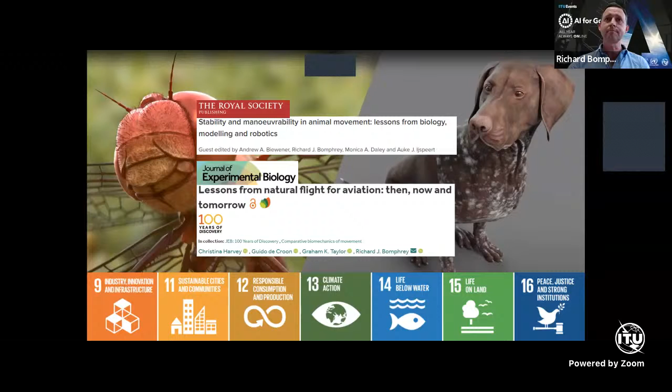And as they do so, they change the aerodynamic forces that are produced, which changes the three-dimensional flight trajectory through space. And as animals are flying or walking or running or swimming, they get a rich input of sensory information, which has to be processed by the controller. And that tells the muscles then how to activate possibly slightly differently, which changes the kinematics, and round we go along this control loop once again.

And then abstracting concepts from that, you can put them onto things which don't resemble the animals very much at all, but they potentially have useful capabilities which have been gleaned from that original observation.

So the messages and possibly the themes we're going to talk about today are that the mechanism I just described in that control loop, they're all interactive and they're co-evolved. If you change one, you'll change the others. In particular, for this one, you might say if you change the wing shape, then that's going to change the sensing information which comes into the controller. It's also going to change the dynamics of the muscles which are required to drive those wings, and so on and so forth. So essentially, it's all interlinked, and you have to take a holistic view of the whole process.

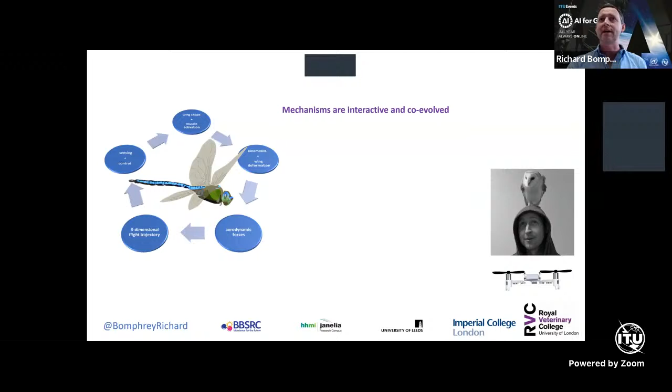We need to get a good understanding of the way that biological models work, and that has to be based on observational science. You can certainly be testing hypotheses as you go along, but having a fundamental look to see what's going on is definitely the first step on the way to these biological investigations. You might want to disentangle which aspects of the locomotion patterns are passive and which are active. And that can be in terms of processing, or it can be in terms of the physiology of muscular control.

And then it's never a good idea to blindly mimic an animal. So you might find that one is particularly skilled in a certain aspect of their locomotion, but it's doing a lot of other things as well. So it might have, for example, a reproductive system or a digestive system, which are not at all relevant to the robot that you want to build. So it's an abstraction of the concepts rather than blind mimicry.

So we sometimes do see from nature performance advantages, and that can be in terms of robustness and stability, topics which are definitely going to come up later in this session. It might be about the economy of travel. It might be things about the material properties and the processing and so on. But biological observation does not give a ready-made faultless design for any particular challenge that you may want to address.

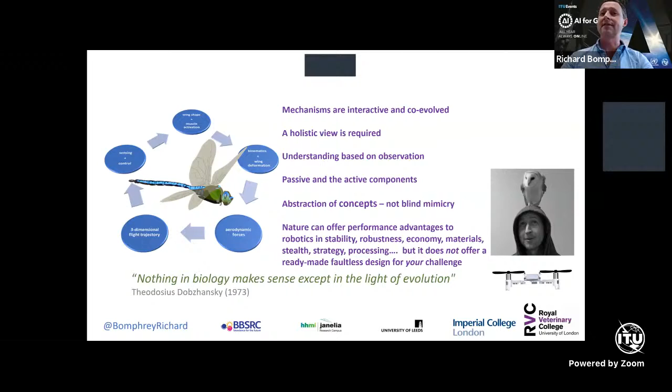Because you have to remember Dobzhansky's quote of 1973, which is that nothing in biology makes sense except in the light of evolution. So I'm going to give you some examples from birds, some examples from insects, and how they've been implemented into robotics concepts in my own lab. And we have a lot of fun with it.

Here is a 360 camera and you're riding on the back of a golden eagle around the lochs of Scotland. And this was a very blustery day, and the bird didn't flap its wings once. What you just saw was a tuck maneuver, which is a way of dealing with the turbulence. And so it manages to keep its head very still. It manages to track objects on the ground, and it manages to fly with very, very little muscular effort, all told. And so there's clearly some performance concepts there that we would quite like to assess and potentially emulate.

And to do that, we can bring it into the lab. And here we have a tawny eagle this time, flying over a big vertical jet of air. And what I want you to concentrate on is that for the tawny eagle and for the barn owl that's coming up in a moment, the head and the body remain very stable, traveling on a smooth trajectory, yet the wings pop up. And the reason that they do that is because they're acting as a suspension system to dissociate the masses in the wings with the masses in the body. And just like your seat stays more stable in your car while the tires go up and down, that's much the same as how birds are negotiating turbulence.

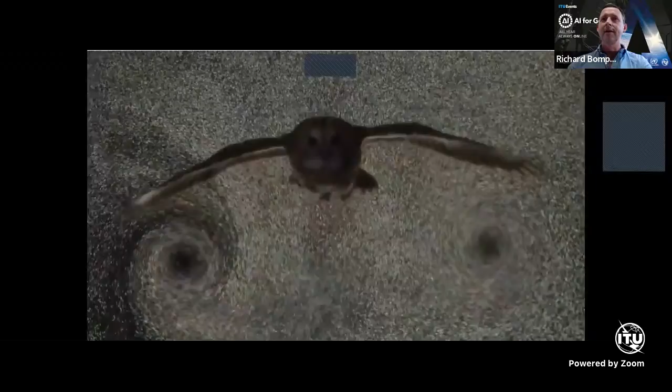We can also look at the drag produced by these animals, and again with clear implications for aviation. Here we're flying birds of prey through some neutrally buoyant bubbles. They're about 1/5 of a millimeter in size and filled with enough helium so that they remain suspended at a certain altitude. And as the birds glide through, you can see that they're swirling up the air, and we can do aerodynamic assessment of that to determine how birds are managing to, in this case, minimize the viscous effect of drag.

To quantify that, we can also track each of those particles. So here we're tracking 20,000 bubbles simultaneously with a company in Germany called LaVision. And the bubbles that are blue are accelerating downwards very fast, and the bubbles that are red are actually accelerating upwards, which is an economic loss, but it's the same wingtip vortex that you would see behind aircraft of all sizes.

Now moving on to insects.

We can do both structural modeling and we can do computational modeling. And here what you're seeing is a very high fidelity model of a dragonfly's wing. And we're subjecting it to a flow as though it's gliding. And you can see that the wing is flexing as it does so.

And this is part of the sensory information which is available to dragonflies for the flight controller that is fundamentally different and a completely different architecture from the way that we currently design aircraft. If you think about aircraft, they have a complex processor with redundancy, and they get very hot and they're not particularly efficient. Whereas insects manage to fly in a very robust way with a brain the size of a pinhead on the order of tens of thousands of neurons, which is very minimal processing power.

And one of the keys to this is to measure as little as possible, as infrequently as possible, and to do both distributed sensing and distributed processing. So by monitoring the strain patterns on this wing and understanding the sensors which encode those patterns, we can start to look at the flight controller and look at different neural architectures which can control complex motions in very unpredictable environments with capacity far in excess of what we can currently manage with engineering solutions.

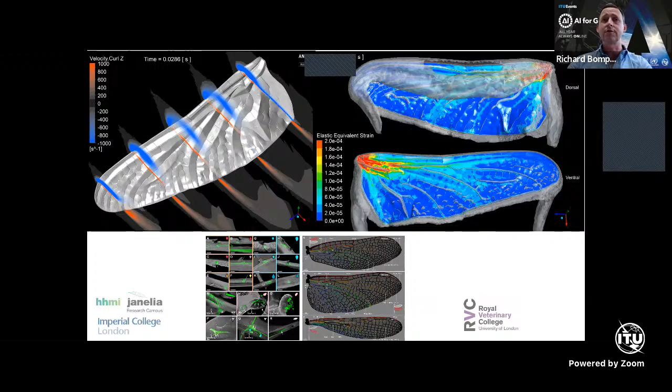We can also look at pest species which will have some societal benefits. In particular, I'm focusing on mosquitoes here. This one's Culex, but of course we've worked on malaria mosquitoes and dengue mosquitoes as well. And again, by tracking their wings, we can understand the aerodynamic flows that go on around these small animals, and also how they manage to have capabilities which we would like to emulate.

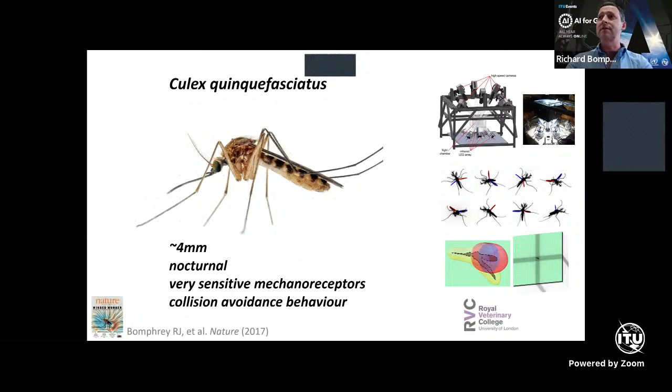In this case, how they manage to avoid surfaces without being able to see them. So even in the pitch black, they will avoid surfaces at light levels below that at which their eyes are functioning. We can also use the computational fluid dynamics analysis to understand their aeroacoustic communication in the swarms.

So in the center of this, there's a female mosquito, and the spheres that you see there are different sound levels, which may or may not be detectable by the males that are forming the swarm. And that can inform acoustic lures for trapping and surveillance, or potentially disruption of mosquito swarm and mating behavior.

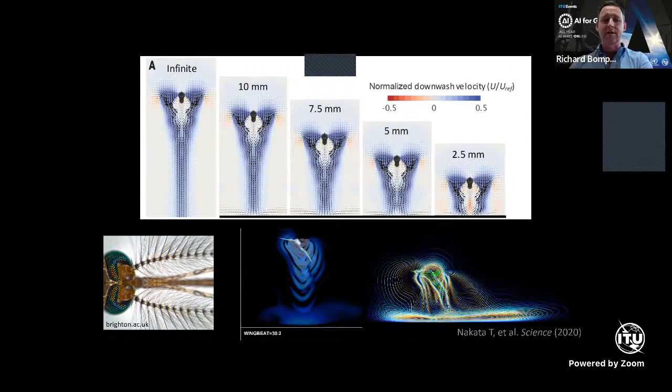If we look at the flows at different altitudes, we'll see that they're slightly different. And this is the same sort of concept as when a helicopter gets close to the ground and starts to incur recirculation. How do we apply that to robotics? Well, we can create small quadcopters which look nothing like mosquitoes, but are using, in this case, differential pressure sensors, which I've squared, if you like, in purple, running into convolutional neural networks, which can predict the distance and bearing to an obstacle which is approaching.

And we can combine that with other sensory modalities, such as vision or acoustic sensors, to get more than the sum of its parts, and therefore a future where we have quadcopters and other aircraft which are more sensitive to obstacle detection and therefore have improved safety.

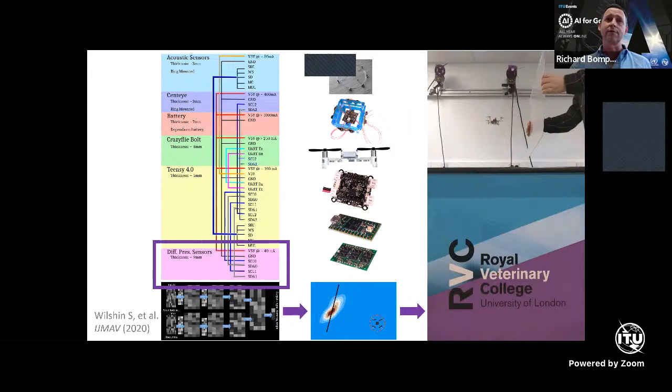Now, I mentioned earlier, we've got an absolutely outstanding lineup of speakers for you today. First up, we're going to have Andy Biewener. Andy's served for 20 years, I think, as editor of the Journal of Experimental Biology, including 16 years as editor-in-chief. He's going to be talking to you about legged terrestrial locomotion and also flight control through cluttered environments, and the principles of guiding movement so that it's both maneuverable and robust.

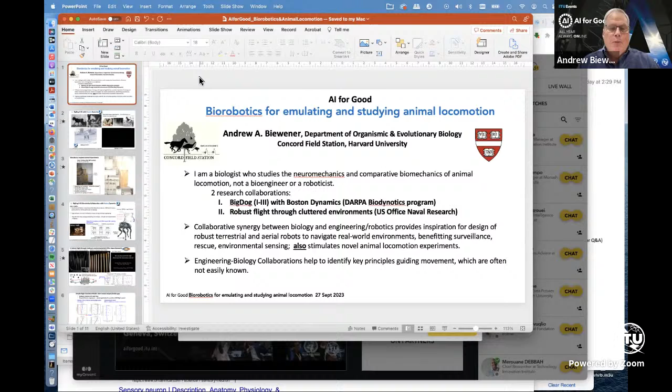So two main points out of these collaborations are, one is that there really is the opportunity for a collaborative synergy between biology and engineering and robotics, which can provide inspiration for the design of robust terrestrial and aerial robots that can navigate real-world environments that will benefit surveillance, rescue, environmental sensing, and other outcomes. These are outcomes that I think both Bob and certainly the other contributors will speak to.

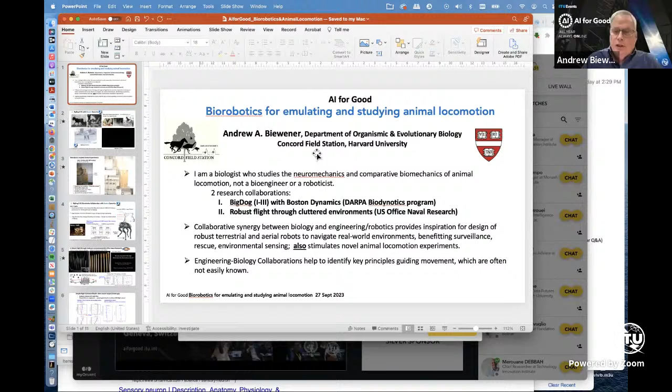So it also provides an important opportunity for stimulating novel animal locomotion experiments on the side of biology. And these engineering biology collaborations are really helpful for identifying key principles guiding movement, which are often not easily known.

So this is our collaboration with Boston Dynamics. Play this a little bit. This is Big Dog 2, but you can see the dynamic robot. I'm going to get rid of the camera. So it makes a lot of noise, but it was stable and moving over a rock field.

And this test on the robot was stimulated based on experiments we did describing the ability of goats to run over a rock wall and their ability to stabilize their feet on both uneven surfaces of rocks and rocks that move. And this came out of studying the design of their hooves. The cloven hoof is an artiodactyl feature. They're able to conform automatically, so passive control of conformation to rock surfaces gave them increased stability.

And then with the ultimate Big Dog 3 here showing it moving over uneven terrain down a snowy slope, and then also being able to maintain support on an icy, slippery surface. So a lot of the control of this Big Dog 3 really was both developing control algorithms, but also understanding the underlying biomechanics of legged locomotion for controlling energy state of the center of mass.

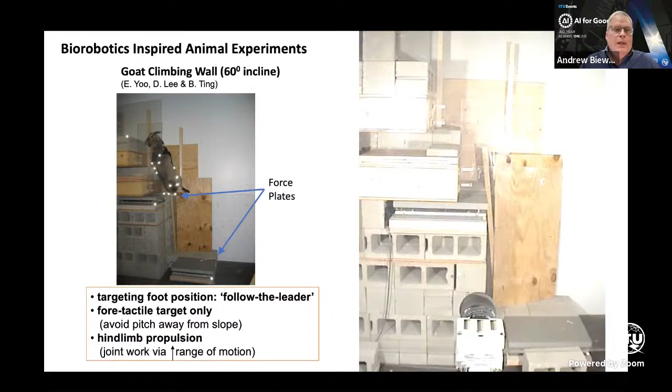So the main insights from our collaboration with Boston Dynamics was that quadrupedal robots really require for stability a knee forward, elbow back configuration. This is Big Dog 1, which had the knees pointing backwards as the elbows do, and it really was not stable and couldn't negotiate over that rock wall. So a simple matter of orienting the knees forward and the elbows back, as David Lee's work, who was a postdoc on the project, showed, biases the ground reaction forces closer to the animal center of mass and reduces the pitch moments.

And we did subsequent experiments with goats and dogs running over force platforms to quantify pitch moments relative to the center of mass and show that they were minimized during trotting and increase in galloping, but they were really able to minimize those pitch moments by moving the center of ground reaction force and the ground reaction force center of pressure relative to the animal center of mass.

We also found that goats and dogs have energy dissipating foot design. So over here, we modeled the joint mechanics of the elbow, wrist, and metatarsophalangeal joints and metacarpophalangeal joints in the knee and the ankle in the hind limbs, where the proximal joints were able to do actuator work and produce energy for moving the animal to increase its center of mass energy state. The distal joints actually dissipate energy. So it's really the design of muscle tendon units that act as dissipative elements, sort of stabilizing the animal. And this was probably central to the ability of the goats to move over uneven rocky terrain.

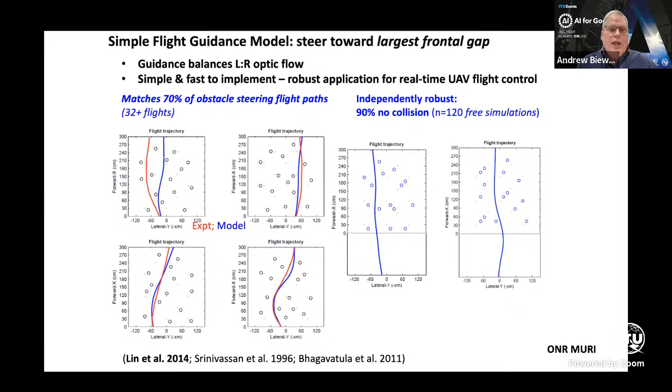So the main insights that came from our collaboration on controlling UAVs through cluttered flight is that birds, in this case pigeons, are highly maneuverable. A simple widest gap navigational model captures a large majority of the flight trials through the cluttered forest, which was these vertical obstacle poles. It greatly exceeds the navigational maneuvering ability of the UAVs, as you saw in the video of the one UAV navigating through two poles of a given spacing.

And as you can see from the videos of the pigeons, wing morphing, the ability of the birds to change the shape of the wing in real time, as well as a superb kinesthetic sense of their body and wing position, underlies the bird's ability to robustly navigate through cluttered environments.

So to finish up, my main take-home points for this webinar are that, no surprise, animals are far more agile, maneuverable, robust, and adept at locomotion under challenging conditions compared with biorobots. And this minimizes both their fall and collision risk. Animals successfully integrate visual, in the case of birds that's a key sensory cue, but also proprioceptive feedback to guide their movements. And this is something that Richard covered in his introduction.

And I would like just to emphasize that most biorobots are teleoperated. They're not really autonomous in terms of navigation. So developing true autonomous robots that can navigate natural environments is really a great opportunity for artificial intelligence to help develop guidance for biorobotic movements and, importantly as well, decision-making. And so in that context, they have the potential for very good services in terms of surveillance, rescue, environmental sensing, et cetera, in natural environments.

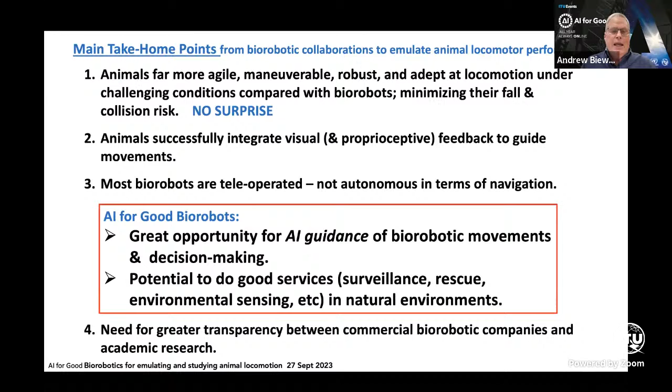So with that, I'm going to turn it over now to Aimy to continue. So I'll stop sharing. Thanks, Andy. That's fantastic. I've got a ton of questions myself. I imagine they're coming in over the neural network as well. But we have to be good and wait for them all for the end. I'll contain myself as well. Okay, so if you're ready to go, Aimy, we very much look forward to hearing what you've got to say. Thank you. Sure.

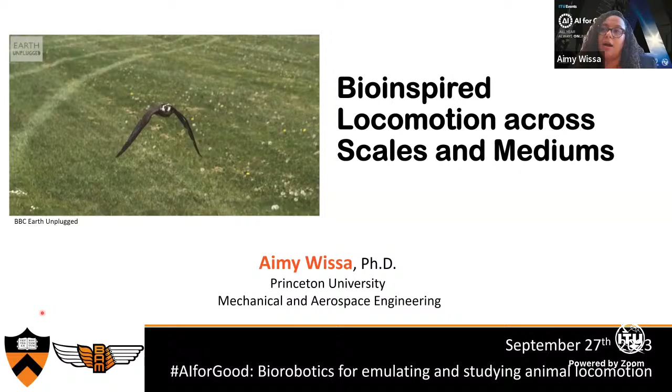Perfect. Well, thank you so much for including me in this panel. I look forward to sharing with you my passion about bio-inspired locomotion across scales and mediums. I'm an engineer by training, so I'm looking forward to sharing my perspective on how engineers contribute to the field of bio-inspired robotics and how true collaborations between biologists and engineers really are the way to advance this field forward.

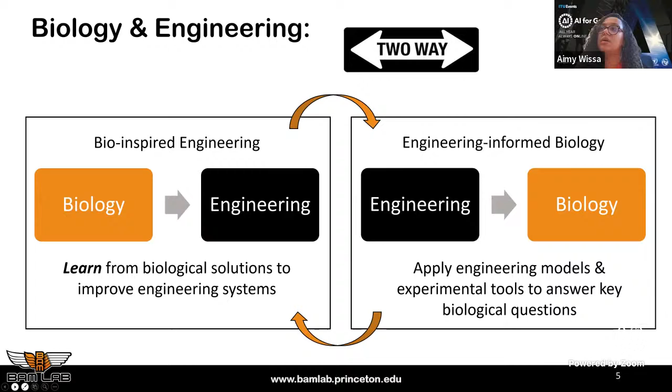So you can walk this two-way street in many fields: materials, controls, collective behavior, different areas. My lab really walks it in terms of locomotion and movement strategies. So for today, I want to spend some time telling you about an example of the bio-inspired engineering way of the street, or how we can learn from birds to design better UAVs, for example. And then the other half of the talk, showing you an example of engineering-informed biology using the flying fish as the case study organism. So let's get to it.

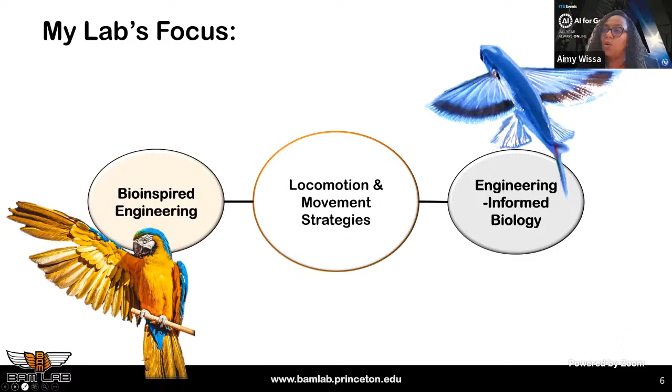Now, when you do bio-inspired engineering, basically you start with a societal need or a problem in our engineering world, and then you find a viable biological solution, and then, through learning and adapting and building and testing and modeling, you finally come to an engineering implementation that doesn't necessarily mimic the biology, but that captures the important physics.

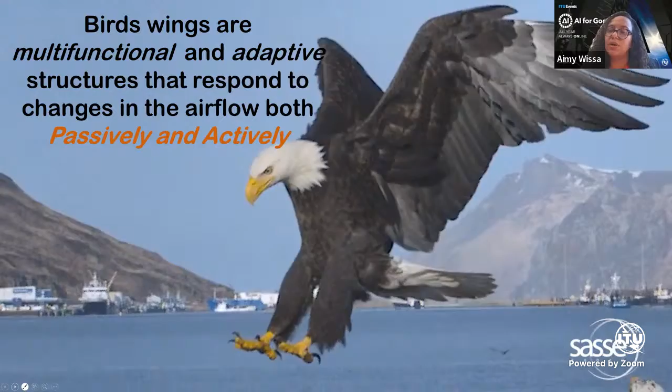There's a lot of things we can look at here: the sensory, the large wing kinematics. My lab just looks at feathers and their role in distributed flow control. I also want to point out something important. When we look at bird wings, unlike aircraft wings, what we see is a multifunctional and adaptive structure. It creates many functions and is able to respond to changes in the airflow, both passively and actively. And I think Richard touched on this.

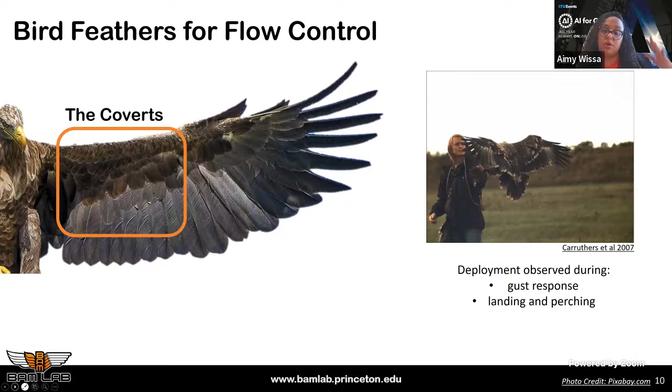My group focuses on a group of feathers called the coverts, and that's what I want to talk about for the next few slides. Birds have many feather systems, and one of those is the coverts. They're on the top and bottom side of the bird wing, and flight observations have shown them to be deployed during a gust or during a landing and perching maneuver. As an engineer, the big question I have is: can we use something similar to the coverts to enhance the performance of UAVs, especially at high angles of attack or extreme maneuvers?

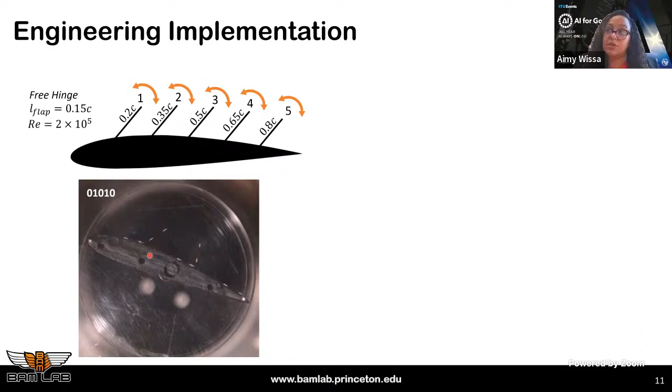So we designed a very simple system. It does not look like feathers; it actually looks like just flaps, and we distributed them all around the airfoil surface. These are purely passive, meaning the oscillations you see are purely in response to the aerodynamic loads. There is no sensing, there are no actuators. We put this in the wind tunnel, and we are able to measure forces and torques, and use lasers and cameras to actually see how the air flows around the wing.

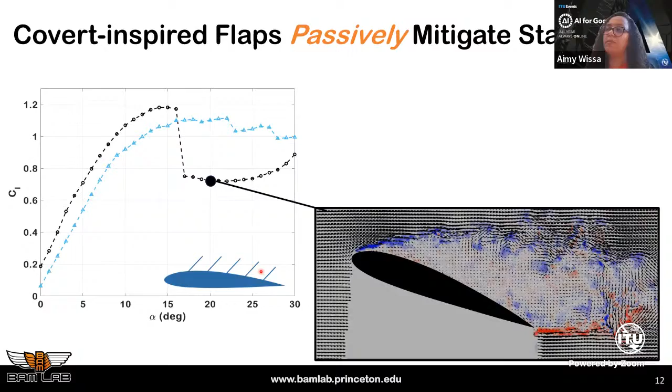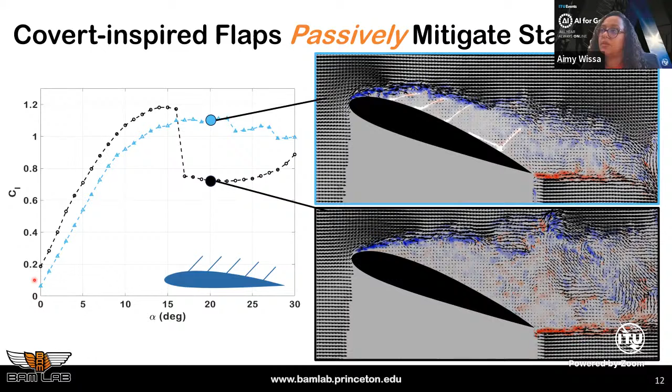Now, we create a system with 5 of these flaps that are passively deploying back and forth, and you have mitigated stall. There is no significant drop in lift. And when you look at the flow field in this video, the air is a lot closer to the surface of the airfoil; this shear layer is a lot closer to the surface. And we're looking at enhancing lift by about 50%. That's payload capability that is really impressive for UAVs.

But this was all passive. Because we understand how this principle works, we can now implement it actively. So we do a control system.

We're able to put this in front of a wind tunnel. Here's a wing that has no tail. And just by having an upper surface and a lower surface covert-inspired flap, it's able to be stabilized in yaw. And then we can take this actually to the field.

And here's an airborne kite. That's an inflatable kite with these bio-inspired flaps, and it's able to fly and regulate its yaw oscillation. And here it's doing something called a figure 8 maneuver that is used for energy harvesting, wind energy harvesting, by being connected to a motor and a winch.

So this shows that carefully abstracted design and carefully abstracted biological principles can actually help us design better flight systems in general, both passive and active. Now, if we jump to the other side of the street, I want to show you this engineering-informed biology looking at the flying fish. This is a collaborative project with Professor Brooke Flammang at NJIT.

And in this case, we start with a biological question about the flying fish. And then we try to design a physical model that can capture what's biologically relevant. And then we use that to form new hypotheses and ask questions about the locomotion of the flying fish.

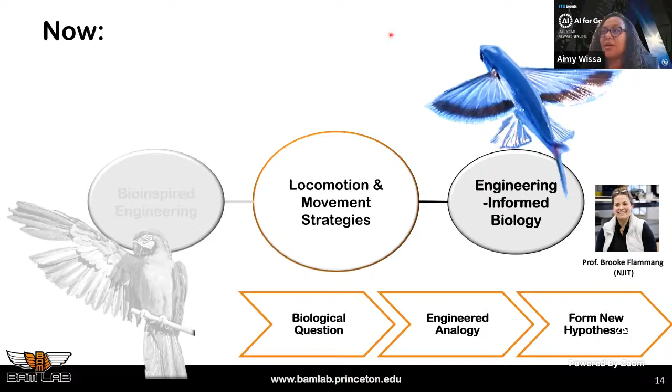So if you haven't met them before, meet the flying fish. They are awesome fish. There's about, I think, 27 species. And what's really interesting about them is their ability to be both efficient in swimming under the water and gliding above the water surface. And this behavior would happen if there's a big predator that is attacking the fish from below.

And if you kind of break this locomotion cycle, first you start, it's a fish, so they swim. And then when there is a threat, they leap out of the water and they deploy their wings. Sometimes they need to actually taxi on the surface of the water using their caudal fin or their tail until they get enough speed. They're able to take off.

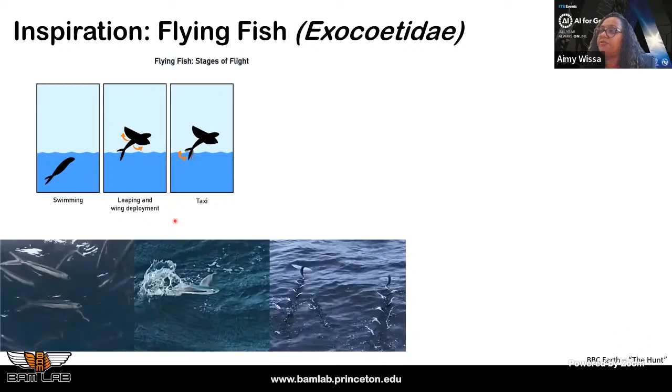If the threat didn't go away, they keep doing this, and they're actually able to do this for up to 0.5 kilometer. This is gliding. It's not a powered flight, which is really interesting from an energetic standpoint. And then when the threat is over, they just go back in the water and keep going. These are the main features that I want to draw your attention to: the pectoral fins, the pelvic fin, the caudal fin. And for the flying fish, we just asked 2 questions.

The first one is, what is the deal with the pelvic fin? So that's a biological question. Why do some species have pelvic fins while the others don't? Or maybe a better question is, how do the species that have pelvic fins use them compared to the ones that do not have them?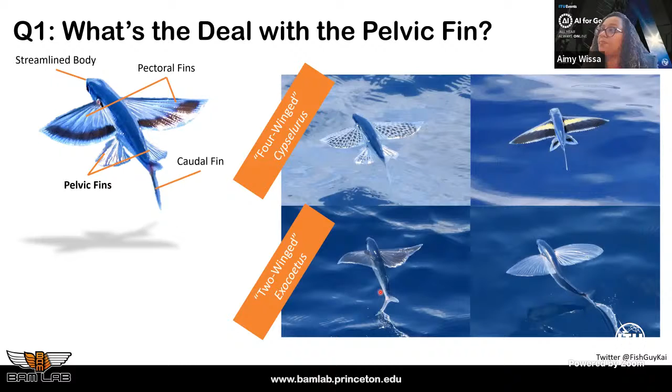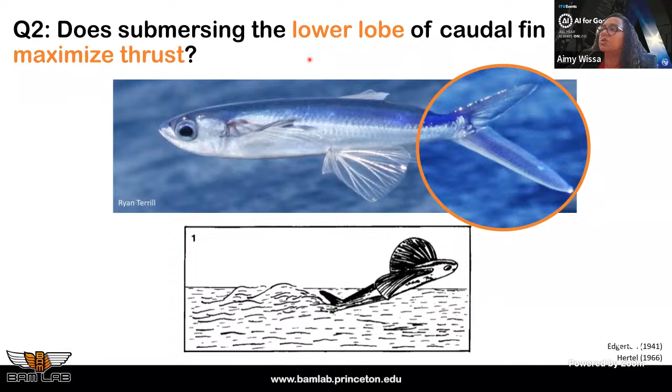The other question we asked is, if you look at the flying fish, they have a really interesting caudal fin. It's asymmetric, and very old but awesome research showed that during taxiing, only the lower lobe is actually submerged. And the big working hypothesis is that during taxiing, the fish only submerge this, and the goal of taxiing is to be able to get out of the water as quickly as possible. So the question is, is there any thrust benefit of just submerging the lower lobe?

To answer both of these questions, it was really hard. As you can imagine, it's really hard to capture these flying fish, to keep them in the lab. They need meters and meters. So one of the best ways to study them is to use a robotic model organism or a physical model of the fish. So here is a video showing the robot we designed. It's modular, it has a simple design, it does not look like a fish at all, but it captures the right movement, the right kinematics, the right dynamics, and the right physics.

And it's modular. So here it is just on a stand, just to show you the swimming motion. Then we added pectoral fins, and this allows us to also look at flight. So then the robot would have the caudal fin to allow us to study some of the hypotheses about the taxiing, and the pectoral and pelvic fins that allow us to study the first question.

So real quick, for the first question, we did wind tunnel testing for configurations with and without pelvic fins, and we're able to move it across the robot. For the second question, on taxiing, we actually designed the robot, put it in the water channel, and varied the submersion depth of the fin.

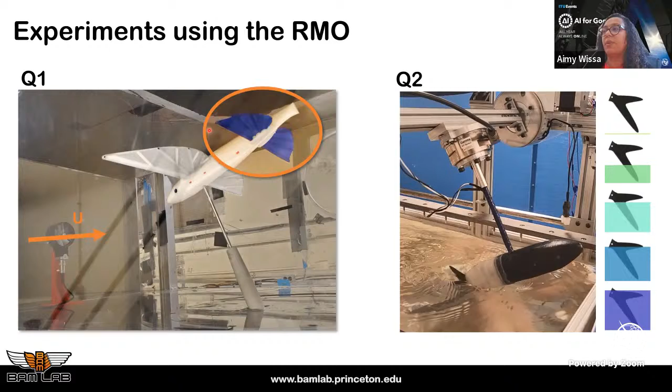And for the first question, we found what is the benefit of the pelvic fin, and we actually found that it's a trade-off between efficiency and stability. And then we found that the right location of this trade-off is to put the pelvic fin somewhere in the rear of the fish and at intermediate pitch angles. And actually, by looking at actual footage of flying fish through crowdsourcing, we found that for most of the species we were able to get footage of, the pelvic fins are located in a place that suggests that trade-off. It's not really favoring efficiency or stability, but between both.

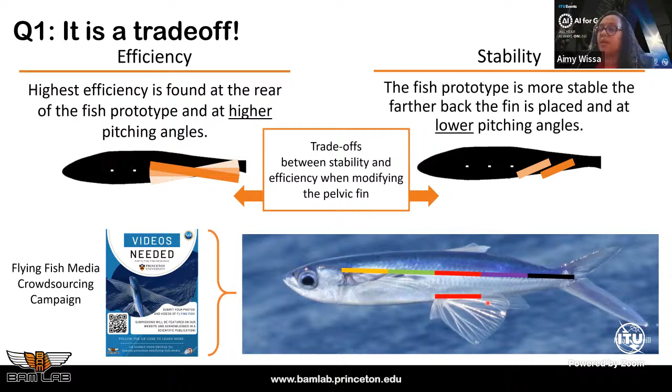For the second question, we found in the experiments that I showed you that actually there is no thrust benefit to just submerge the lower lobe. So maybe there's other reasons why the fish is only submerged in the lower lobe, or because of how old these observations are, maybe it is not just the lower lobe and the whole caudal fin is submerged during taxiing.

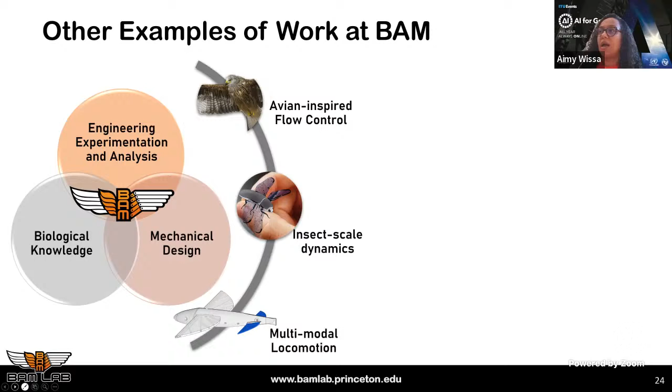So to conclude, I just want to highlight that this kind of research on bio-inspired robotics, for the other panelists and myself, is highly interdisciplinary. It would not be possible without all these collaborations. And it is challenging because it requires us to think about different physics. And it's a large parameter space. There's a lot of things to consider, and that's where AI can be of huge benefit to reduce such a parameter space.

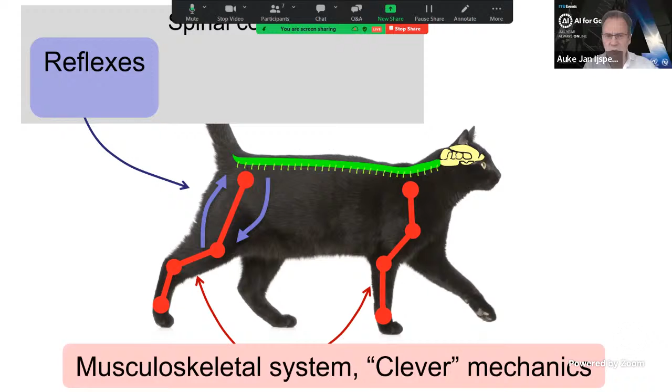And at the first approximation, I think there are 4 main ingredients. The first one is the clever mechanics, the musculoskeletal system, which is very well designed to do locomotion. Then there is the spinal cord with, obviously, multiple reflex loops that are super important, and this very interesting concept of central pattern generators. These are networks of neural circuits that can oscillate by themselves, and they act as a kind of feed-forward controller to provide rhythmic patterns as necessary for locomotion.

And then obviously you have higher levels of the brain that will modulate all this with the descending pathways. But what's interesting is there's a fairly finite number of these pathways, and there are not that many. So it's a bit like a puppet on strings, where with a limited set of strings, the higher part of the brain can modulate complex locomotion. And I find this very fascinating. So in my lab, we like to use models and robots to investigate how these work together. And especially we focus a lot on the spinal cord circuits, how the feedback and the feed-forward components of the spinal cord work.

And we have the hypothesis that during evolution, the respective role of these components have changed, with lower vertebrates like lamprey and salamander being more CPG driven by the feed-forward central pattern generators. And the more you go to terrestrial mammals, which have more unstable locomotion, the more you need to have multiple reflex loops and more descending modulation to do visually guided feet placement.

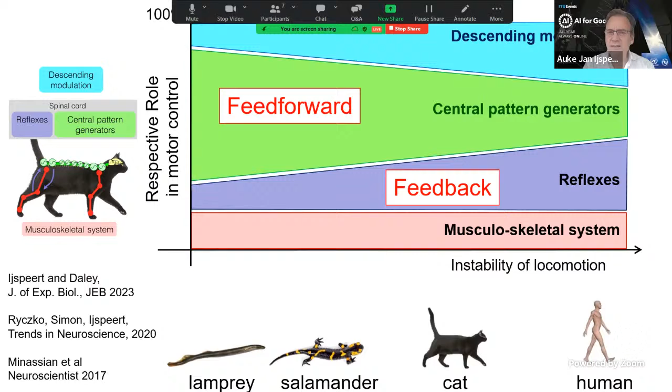But to test this, we need models, so models of these circuits. And I think robots have a key role to play to close the loop with the real environment. And here, one of my favorite animals that I've been studying for quite some time is the salamander, which is a very interesting animal. It's a very old animal. And here as an amphibian, we made a robot that can replicate it.

And what was interesting is that we could show the beauty of the central pattern generators, how they can beautifully control locomotion under the control of, in this case, just 2 descending drives, representing stimulus from high parts of the brain sent to the spinal cord. In our case, we do it with a remote control.

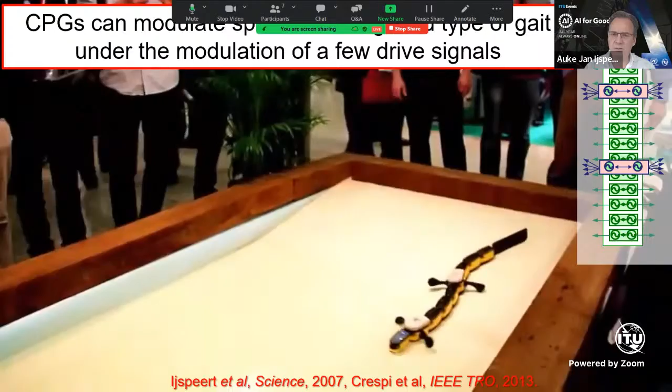But what we could demonstrate is that with 2 signals, you can nicely control the speed, the heading, and even the type of gait by going into swimming mode: high drive mode is swimming, and low drive mode is walking. So I think this is a nice invention of nature, to have this multi-layered control and make sure that the spinal cord is in charge of this low-level pattern generation that you see here in the salamander.

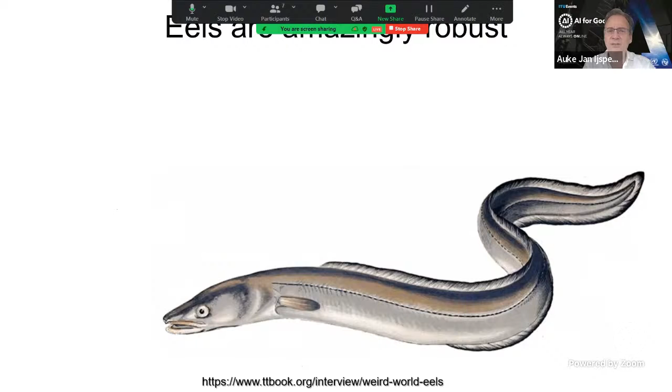Nowadays, we look a lot at sensory feedback, how sensory feedback plays an important role as well. And we went back to just anguilliform swimming, as you see in lamprey or eels. And here what's interesting, for instance, is the eel is a very robust animal, in the sense that if you do a transection of the spinal cord of the eel, it can keep swimming and you almost see no difference compared to the intact animal. So it's very robust in terms of swimming skills.

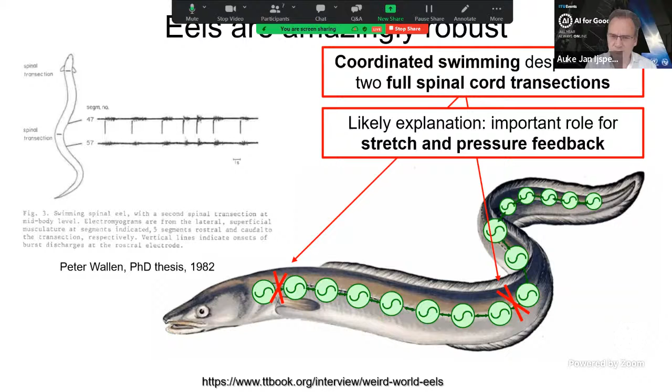And it looks like, therefore, there must be some kind of local mechanism below the transections to be able to keep the oscillators active and to keep them synchronized with the rest of the body. And it must be sensory driven, since the descending signals are not arriving anymore below the lesions. So here with colleagues, we wanted to see how this works. And again, using simple models of the circuitry, the oscillators, the coupling, the feedback, and the robot, we could study how possibly this works in the real animal.

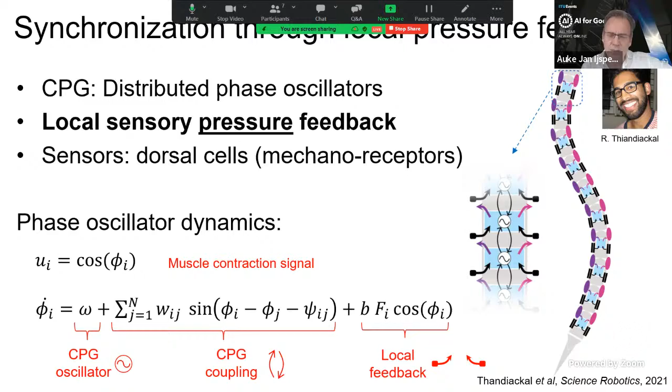So what we did is, for instance, design a swimming robot with a very primitive skin, where we have little load cells behind each little black plate. And with that, we can mimic a bit how the skin can sense force between left and right on every segment. And we can provide that to our models of the spinal cord.

And what's interesting here, like also mentioned by Amy, we can do things that are very hard to do on the real animal. On the real animal, we know the circuit is complete. It has feedback, it has coupling, it has oscillators. But here we can see systematically what's the role of each of these components. And maybe the most interesting result of the paper was when we removed all direct couplings, like an extreme case of the eel experiment. There's no communication directly between the oscillators. And we wanted to see if the local feedback could compensate for these missing connections.

So here is what happens. On the left, you see a video where we start with random initial conditions. There's no coupling and no feedback. So obviously, there's no way of synchronizing all these oscillators, and there's no way of getting good swimming. You kind of get a bit of wriggling, but not forward locomotion.

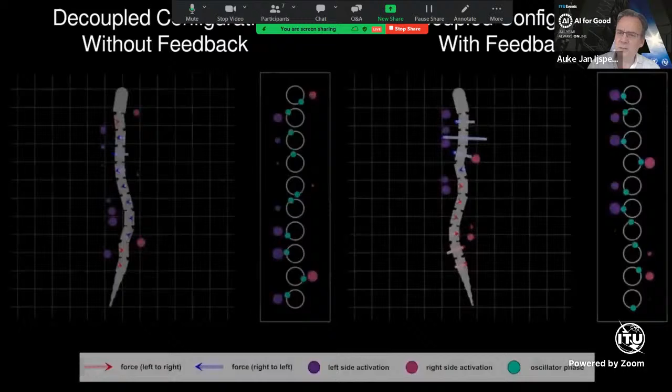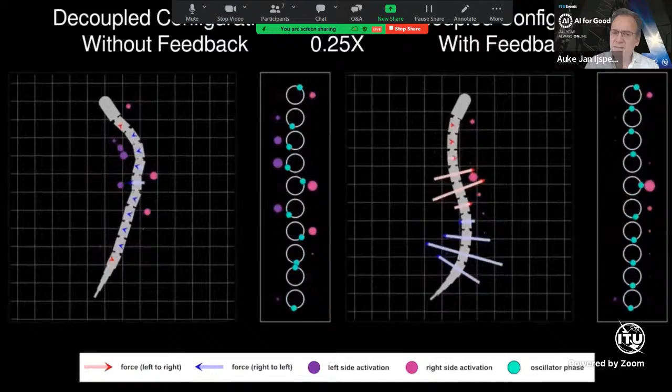But what's interesting, if you now include the feedback and still don't have any coupling, the feedback, even if it's very local, leads to a global emergence of the traveling wave. And it synchronizes beautifully. And not only that, it also synchronizes at the right phase lag to do very good forward swimming. So that's interesting because it means that in principle, sensory feedback could synchronize all these decoupled oscillators. And it's probably what happens in the eel, where the feedback compensates for missing couplings.

So we also did this on the real robot. It takes a bit more time to reach steady state. Every oscillator doesn't know what the neighbors are doing. But by just measuring the local force of the water on the left and right of the skin, that local signal becomes a nice global emergent phenomenon for swimming.

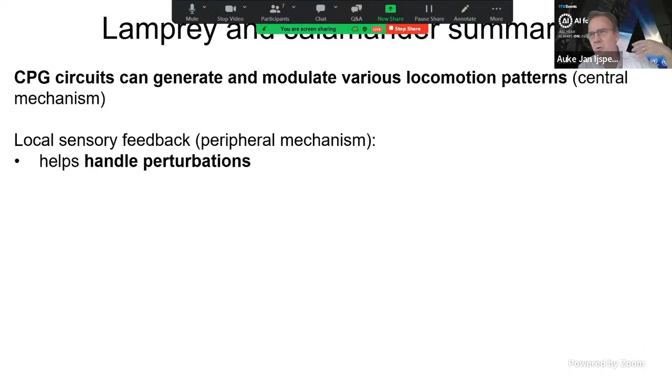So sensory feedback also does its job on the real robot. So to summarize, what's interesting here, I think, is the fact that CPG circuits have this beautiful feed-forward component and can modulate locomotion extensively. But on top of that, the feedback plays a lot of important role, not only to handle perturbation, which is obviously important, but even can contribute to synchronizing oscillators or even generate rhythm, something I didn't

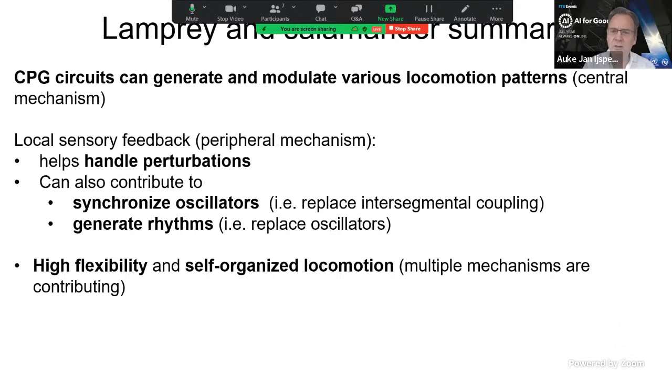have time to cover. So therefore, in animals, there's this beautiful flexibility and self-organized locomotion where many things we see are like emergent properties of multiple mechanisms contributing together. And in terms of robotics, I think this is a very nice source of inspiration for a very fault-tolerant distributed control. You can make systems that are really robust and keep swimming despite having missing connections or missing sensors.

Now, very rapidly, in the last 2 minutes, another project where we wanted to use robots to explore locomotion. This was a nice collaboration with John Nyakatura and John Hutchinson, where we wanted to study the past and use a robot to study the Orobates, which is an early tetrapod. It's in between amphibians and reptiles. And what's interesting, it's an extinct animal, it doesn't exist anymore, but we have a very well preserved fossil of that animal and also preserved footprints of the same species.

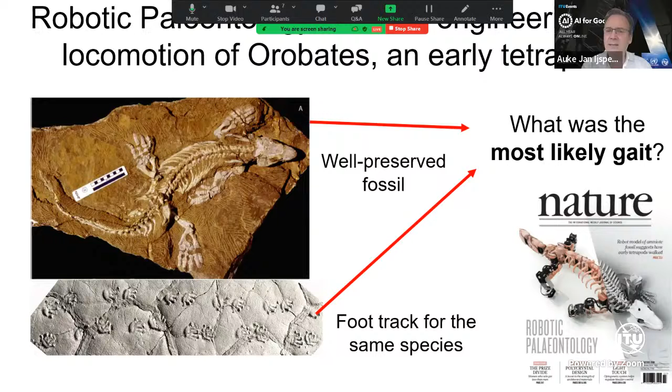So it's a kind of a unique way of trying to match a morphology to a foot track and see what was the most likely gait that that animal had used. And here again, a robotics approach can be useful to do scientific work because we can replicate more or less the morphology of the animal. And then we can use inverse kinematic controllers to systematically explore the space of possible gaits that this animal could

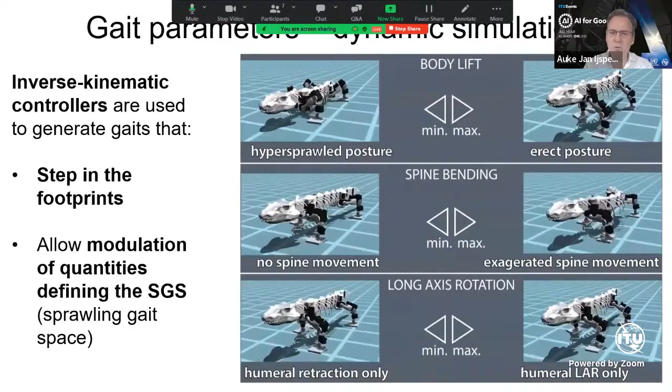have used. And in the paper, we define different important criteria like the body lift, how high was the body, how much did the animal use the spine, how much does it use the first degree of freedom versus the second one in the chain of the limbs. And basically, we would explore all possible gaits that this animal could have been using. And what's interesting, we could also compare that to modern animals.

And what we found out is, first of all, that in principle, the animal could have used many, many gaits. So all the little points here are possible gaits that the animal could have used. But then if you quantify how likely they are according to some metrics, like how much energy does a gait use, how well balanced is it, how accurate is it to walk in the footprints, we kind of zoomed in into the most likely gait and found that the most likely gait is very similar, we believe, to the caiman, which is a quite modern reptile.

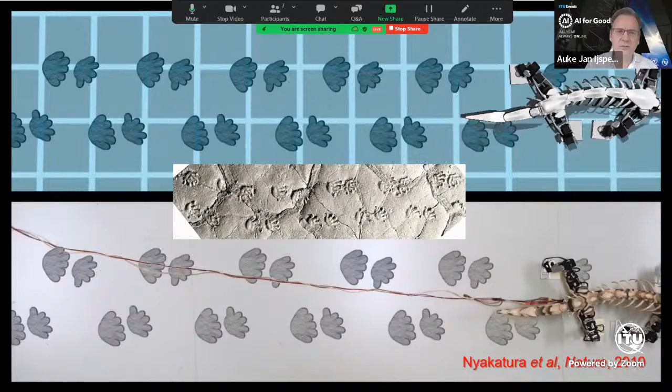Thank you. It's really interesting how you have to advance as far as possible to look back as far as possible. I'm sure there's an analogy with space telescopes or something like that. But yeah, that was great.

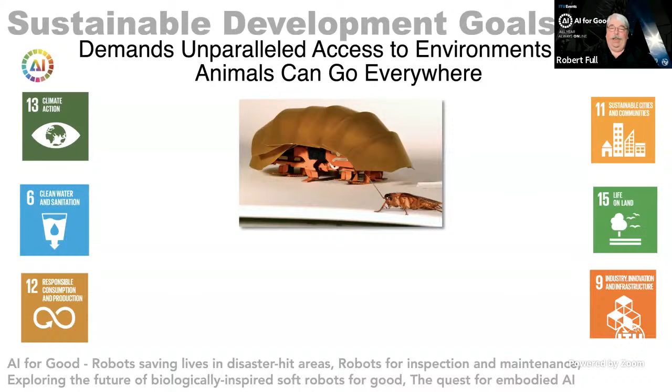Thank you for this opportunity to discuss biorobotics for emulating and studying animal locomotion. Many sustainable development goals demand unparalleled access to the environments. Animals can go everywhere and therefore can inspire robots that assist us in biodiversity conservation, environmental monitoring, safety inspections, natural disaster search and rescue, and security.

Bio-inspired robot design is challenging, but fortunately there continues to be a convergence of life and technology, bringing together enabling technologies, theory, synthesis of systems, and an increasing application demand. Nature's diversity really does enable discoveries. You saw some of the examples already, and we can use the principles and analogies from biology when advantageous, integrating with the best existing human solution to inspire robots.

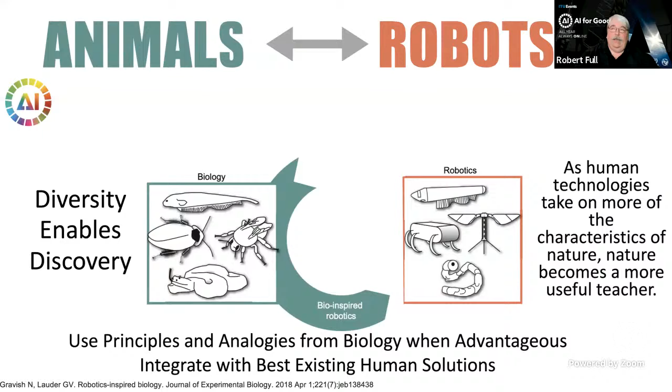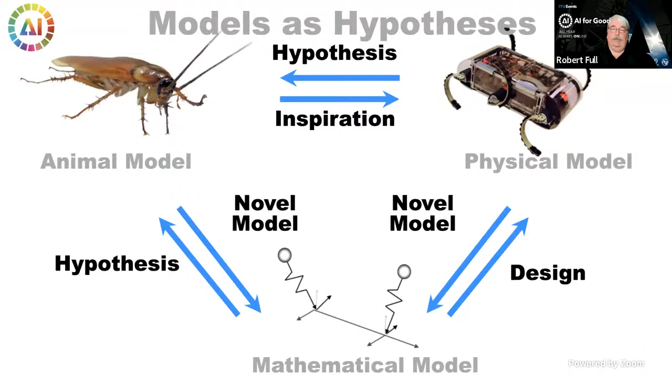Now, to understand our animal model, we create both mathematical and physical models, and then our new animal discoveries can lead back to new mathematical and physical models, and those models can inform one another. Physical models are incredibly valuable because they can uncover unknown important parameters missed in mathematical models, because physical models meet the real environment. They can be a starting point when no mathematical models exist at all. Physical models can allow novel experiments not easily modeled mathematically or done on an animal. And physical models can be a first step towards prototypes for an application.

We tend to think of locomotion as starting from the brain and spinal cord to the musculoskeletal system that interacts with the environment, with control being realized by neural feedback, like Auke talked about, using reflexes. But it's important to remember that the brain has a body that can exert mechanical feedback, actually often before reflexes. So sometimes it's called a preflex.

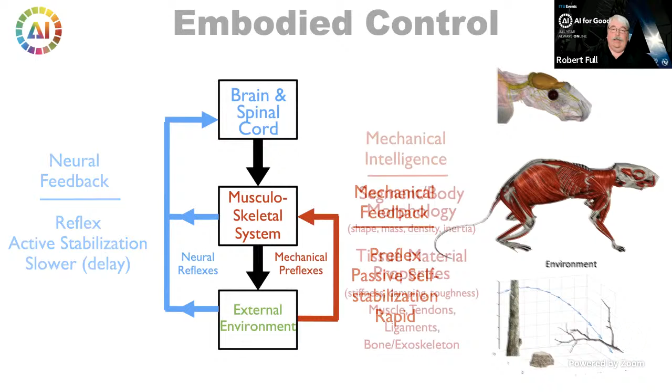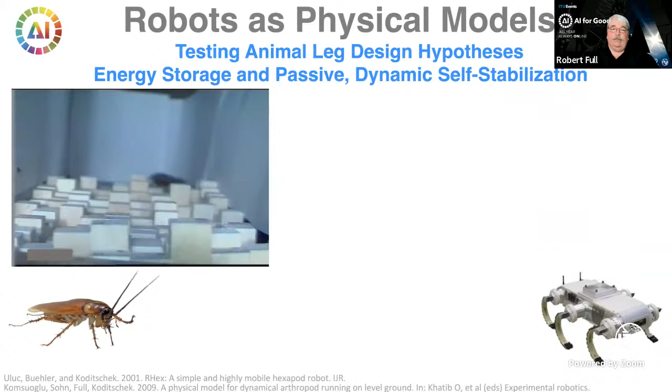Intelligent mechanical control can be built into the morphology and the material properties of tissues so that it can manage energy and reject perturbation, much like a tuned suspension in our vehicles. So here's how we use physical models to understand animal leg design. Cockroaches can rapidly traverse rough terrain, and we can test the hypotheses of leg function by changing the leg design and position on an amazing physical model, the hexapedal robot RHex, built by our engineering collaborators now at UPenn, and it could negotiate rough terrain in the field.

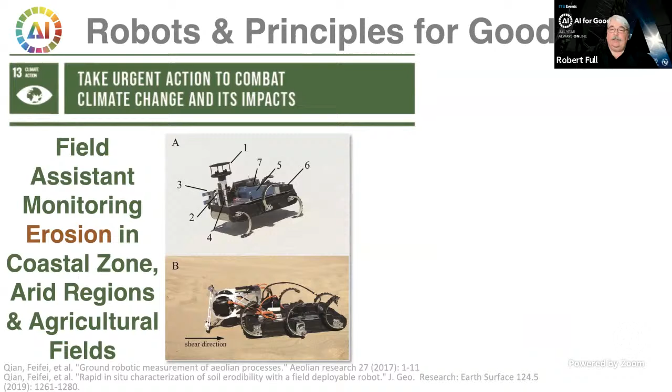The robot RHex has begun to act as a field assistant, monitoring erosion to combat climate change that can impact our coastal zones, arid regions, and agricultural fields, actually by measuring erodibility using a novel plowing test of surface soil shear resistance.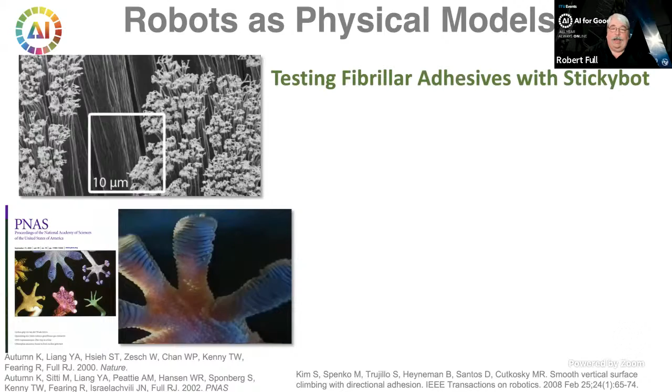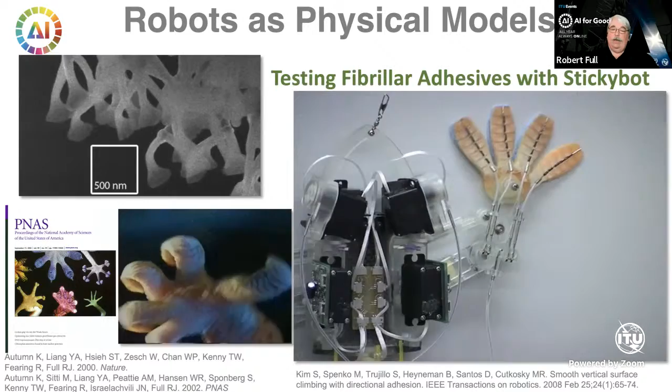We also discovered that geckos seem to be able to go anywhere with the help of feet that adhere by millions of tiny little hairs. If you look at each hair, they have the worst case of split ends possible, having tips on the nanoscale interacting by intermolecular or van der Waals forces. And to move, they actually lift their toes by peeling, which is very odd looking. And our incredible engineering collaborators at Stanford built a robot called StickyBot, which helped us explain how the gecko adhesive needs to be loaded to function. And this robot could climb smooth surfaces like windows and walls and go where other robots could not.

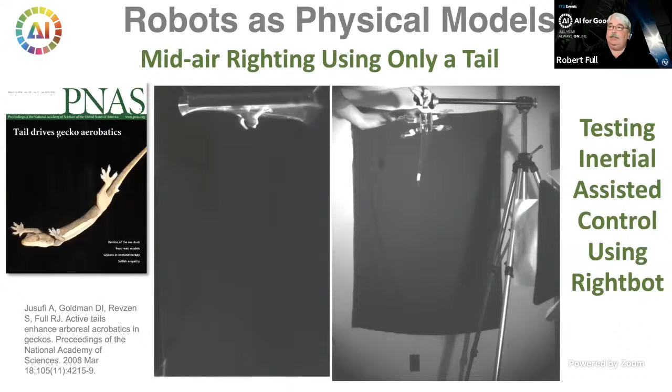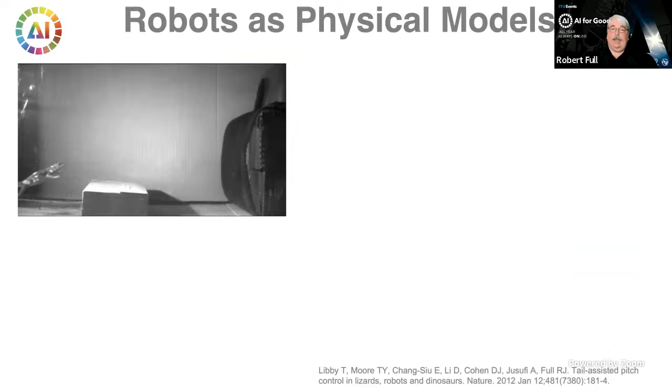We found that geckos use their tails to rapidly right their body in midair to position themselves in a gliding posture. And we made a robot that could do the same to test how the geckos use this inertial assisted control. We discovered that inertial assisted tail control can also simplify pitch stabilization in jumping. You see this lizard. The lizards can redirect momentum from their body into their tail. And we tested tail control with a robot we named TailBot, and we even did a dinosaur simulation to see what they could do in terms of stability.

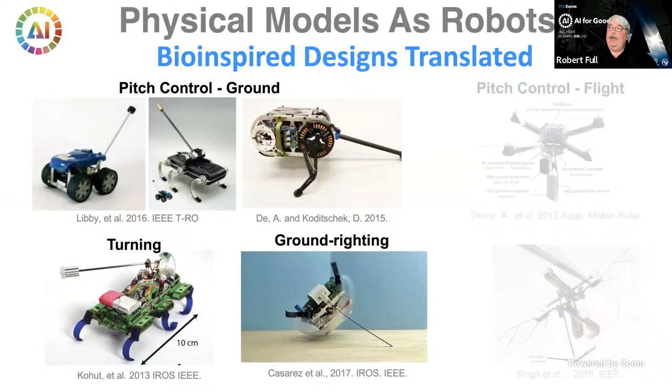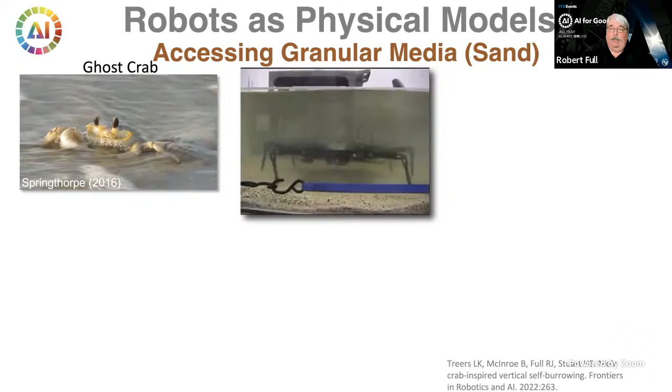The physical models we use for testing hypotheses can actually be translated into effective robots, not only for pitch control, but also turning, ground righting, and are even being used for flight. Accessing granular media in coastal areas is extremely challenging for vehicles, but our research on ghost crabs led to the design of a robot Ariel that could maneuver in the surf zone, which helped test hypotheses of leg design in the crabs and could be used for humanitarian demining.

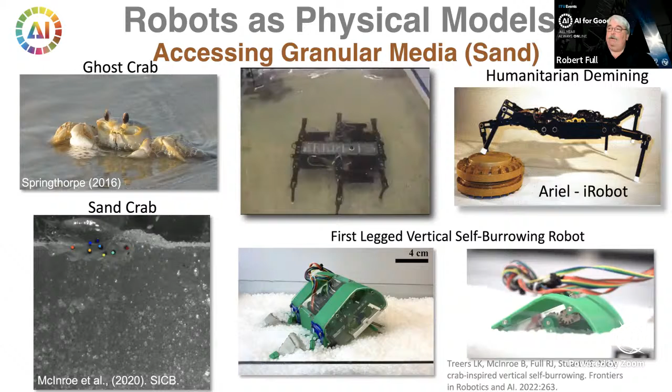So certainly we must complement mechanical intelligence with neurocomputational intelligence involving the integration of perception and attention, memory, deliberation, motivation, learning, innovation. In our current project on free-ranging squirrels, we're examining these areas, decision-making, learning, and innovation, and their integration with biomechanics. And we tested decision-making on branches that varied in their stiffness and found they often stuck the landing, but frequently they actually undershot the landing or overshot the landing.

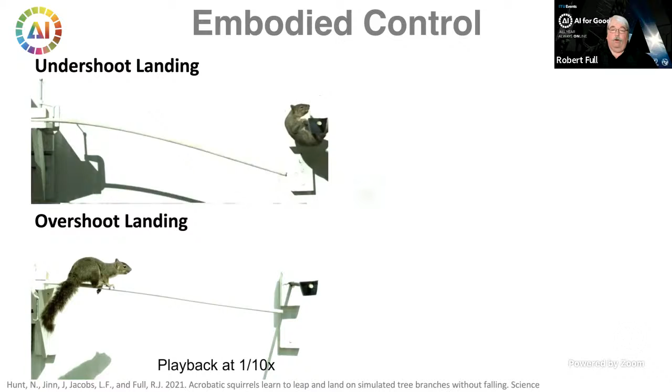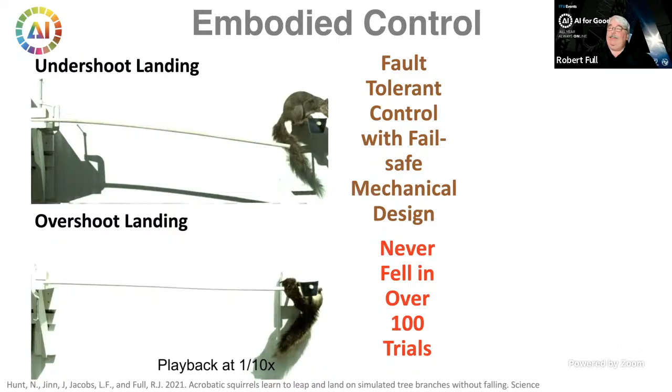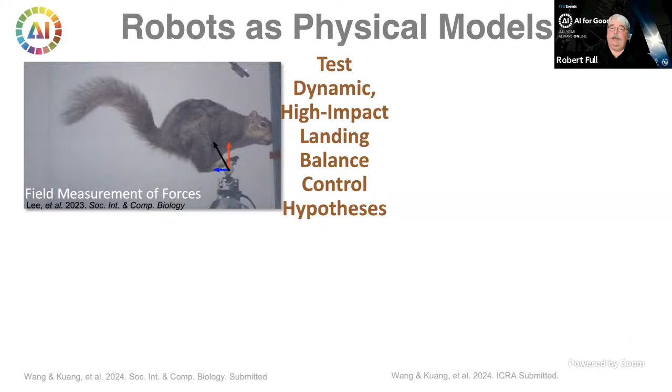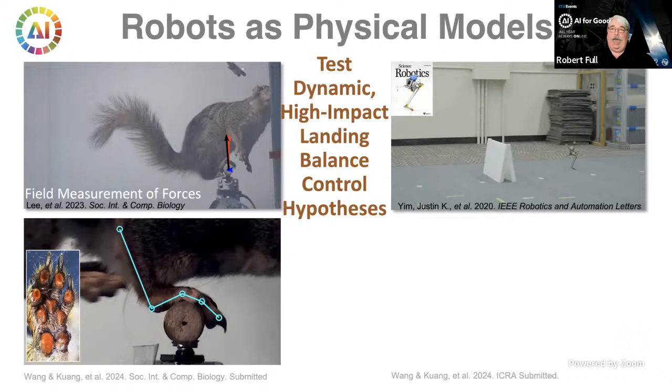Yet, amazingly, their mechanical system showed incredible fault tolerance with this fail-safe mechanical design, so they never fell in over 100 trials. And they constantly surprised us by innovating new ways to perform, like this one really surprised us. Just amazing. So to understand landing control, we took our equipment outside and measured the forces to test dynamic high-impact landing balance control hypotheses. And fortunately, we were collaborating with incredible engineers at Berkeley who made an amazing physical model named Salto, where they revealed some of the key parameters for landing control. And clearly, we could see that the squirrel uses incredible feet that have specialized pads that play a role. And so now we're testing mechanical intelligence using robotic feet.

I think really a grand challenge to understanding how animals locomote will require some kind of integration of machine learning, AI and physics-based multi-scale modeling. So how do we best combine the powerful correlational techniques with physics-based models that can uncover the mechanisms explaining the emergence of function that we see?

So to conclude, the synergy between biology and robots holds promise for both. I think future metamaterials will take us beyond the soft regime to materials that couple sensing, actuation, computation, and communication. That embodied control displaying mechanical intelligence has the opportunity to show energy savings, computational efficiency, and also biodegradability and sustainability.

The integration of AI and machine learning with multi-scale physical modeling will allow robots to access environments for good, listed here. However, we must preserve animals in their environments. Otherwise, their secrets will be lost forever. Thank you.